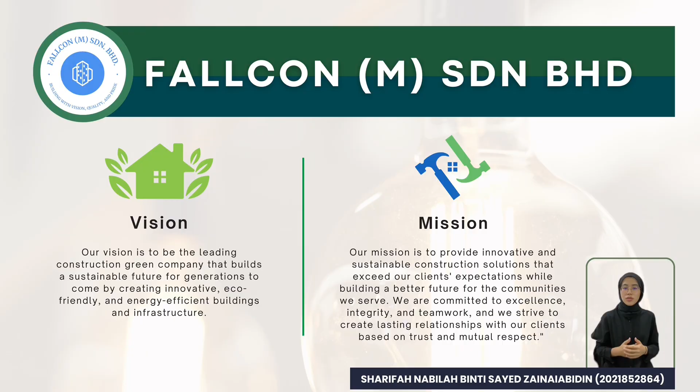Thank you, Sharifah. Assalamualaikum. My name is Azrin binti Hassan. I will continue presenting the project's name and details.

The project name is Greening the College of Creative Arts.

Next is the location of the project. The project is located inside Universiti Teknologi MARA, UiTM Shah Alam Selangor, which is nearby Tun Abdul Razak Library.

The project details are known as the College of Creative Arts that was established in 1967. It consists of complex Ilham Block A and annex buildings. It has a 4-story building of Block A and a 3-story building of annex buildings.

That is all from me. Now I will pass the presentation to the next presenter.

Assalamualaikum, my name is Adriana and I'll proceed with the first issue, which is lighting. The site location has installed a lot of unnecessary lighting in the area. For example, based on the pictures given on the slide, the fluorescent lamps are installed in areas where there is already enough natural light, or especially in the corridor where the light needs to always be on even though there are no people.

Hence, it may be unneeded and lead to more energy use. Moreover, students and staff often forget to switch off the lighting, which results in greater energy cost and increases the carbon footprint for the building.

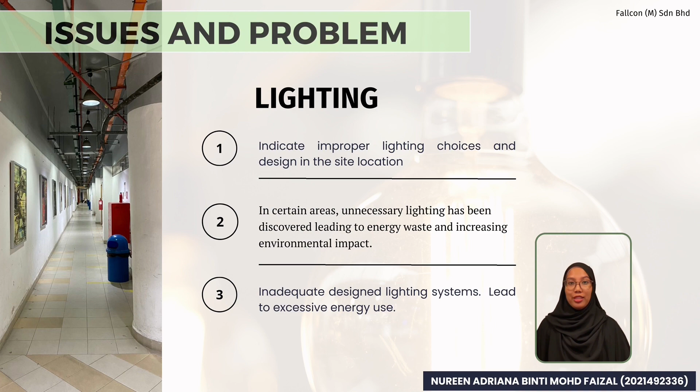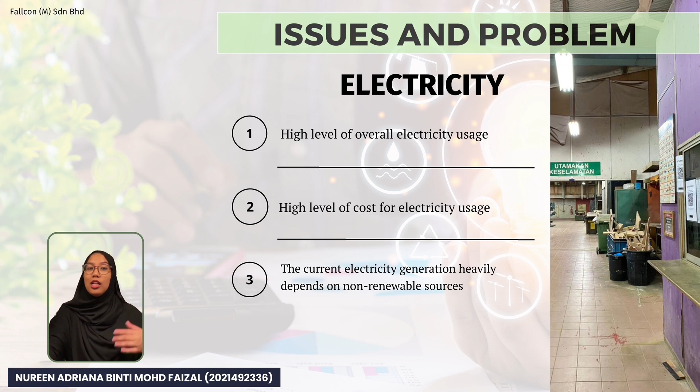The next issue is electricity. This building has a very high level of overall electricity usage. Why? Because at least 2 air conditioners may be found in each and every room. Do you know that one of the contributors to increased utility cost is the air conditioner? Hence, the electricity usage might be higher because students and staff will always need to turn on the aircon, because the aircon also works as ventilation in the area.

Next issue is the water tap. Water taps at the sinks are typical and convenient solutions. However, they might not be the ideal option in every circumstance. Water wastage will result from water taps that dispense more water than necessary. For example, these buildings are used by students of creative arts, who sometimes often use a lot of water for their art too. Therefore, the water taps may result in an increase in the water bill if they are not used with proper care in the long term. Eventually, these types of designs are not sustainable and far from achieving green building status.

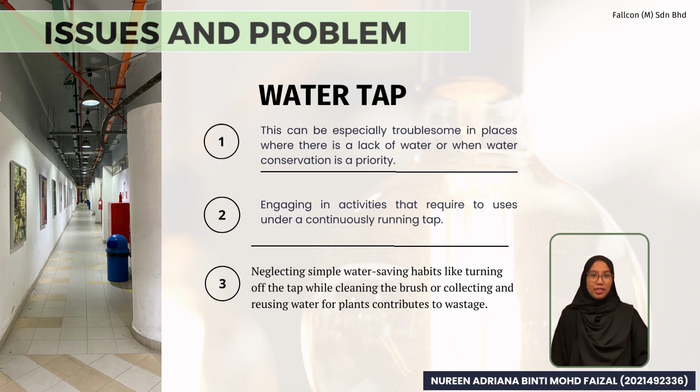Thank you, Adriana. Assalamualaikum, my name is Shaz and I will continue with the next issue, which is roofing. One major concern is the insufficient slope for water drainage. This can lead to water accumulation, leaks, and even structural damage. Moreover, flat roofs lack slope or pitch. This results in poor natural lighting entering the building, impacting energy efficiency, aesthetics, and occupant well-being. Inadequate insulation leads to higher heating and cooling costs and can also cause condensation problems, leading to mold and damage.

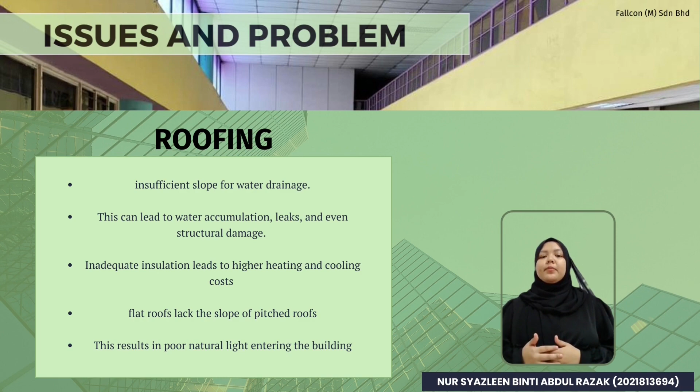Next issue is the rainwater harvesting system. Water quality is a major concern. Although rainwater is generally safe, it can be contaminated by pollutants in the environment. Another issue is the disposal of water. However, unprocessed water from the sky undergoes a natural condensation process.

That's all from me. Thank you. Now I will pass to the next presenter.

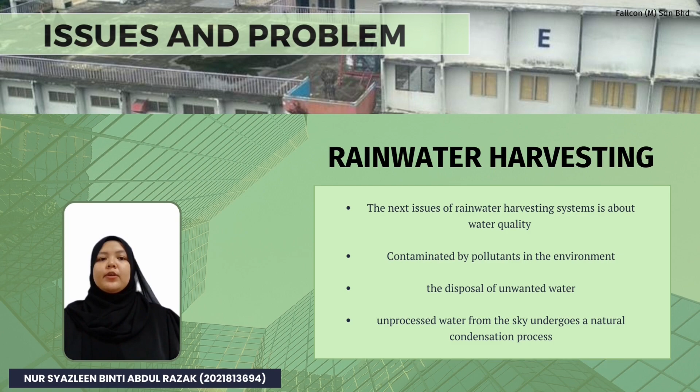Assalamualaikum, my name is Omar Rajidi and I'm going to present the elements proposed in this case. Firstly, we offer a photovoltaic solar panel system that uses the photovoltaic effect to transform sunlight into electrical power. It's an important part of a solar power system that creates renewable energy.

The following element is the polycarbonate skylight roof, which allows natural light to enter the building while safeguarding it from weather damage.

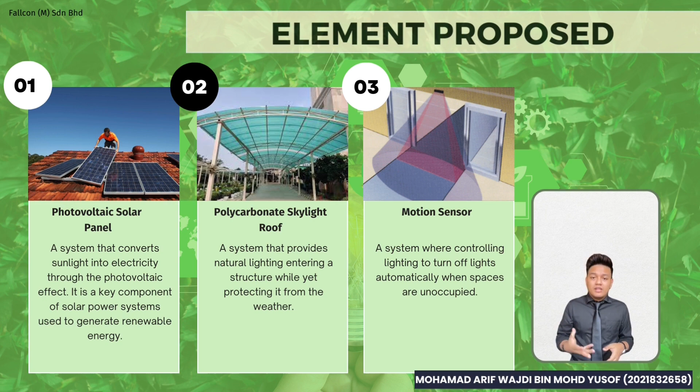Then there is the motion sensor, which is used to manage lighting and turns off lights automatically when places are unoccupied.

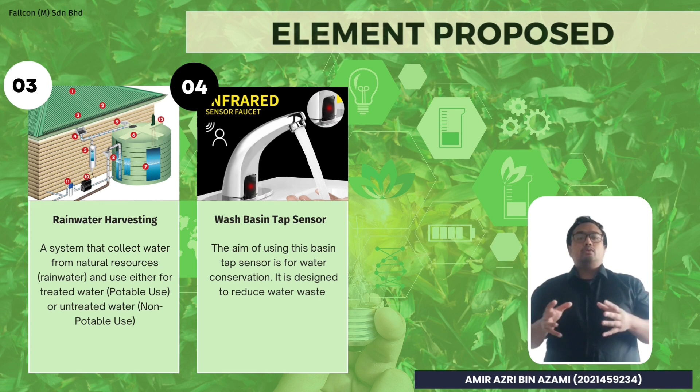The next element that we propose for our building is the wash basin tap sensor. The aim of the wash basin tap sensor is to reduce water consumption and reduce the wear and tear of the components for the wash basin.

Thank you. Now we move to the cost benefit analysis. As you can see in the table, before installation of the photovoltaic solar panel, due to excessive occupant utilization, electricity consumption might be unreasonably high. However, after the solar panels are installed, our electrical expenses can be reduced by 10 to 15%, and we are able to generate income by selling excess energy to TNB and having it reimbursed back to our account.

For the polycarbonate skylight roof, since the system is not yet in place, there are no special maintenance or cost saving considerations. However, after installation, electricity costs can be reduced by up to 15% since it reduces the need for artificial lighting and requires less maintenance. This might result in lower installation and labor expenses.

Before installing the motion sensor, the cost for electricity in the academic building is typically more extensive. This is because lights are left on even in empty areas, resulting in wasted energy and higher electricity expenses. Nevertheless, the initial cost of installing the motion sensor may be more than that of regular lights. Motion sensor enabled lighting systems, on the other hand, generate considerable cost savings over time, with up to a 90% decrease in energy use. Now we will move to Azri for the next explanation.

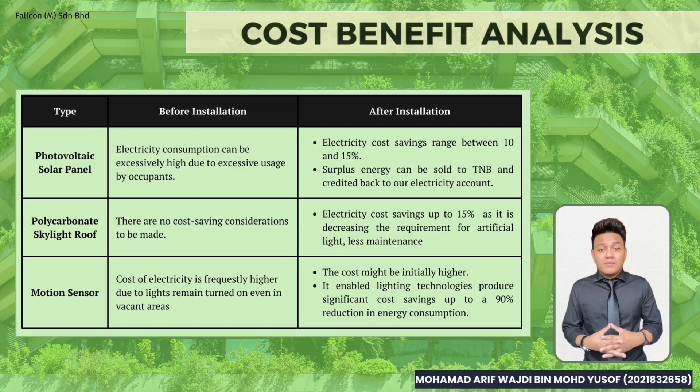Thank you. Now I will talk about the cost benefit analysis of the rainwater harvesting system and also the wash basin tap sensor. For the rainwater harvesting system, before installation, the water used for non-potable use is directly from the local authority, so there are some charges when using the water. After installation, the charges by the local authority will be no more because they use the natural resource from the rainwater. But there are some maintenance charges, though the cost is not as much as the charges from the local authority for normal operation of cold water.

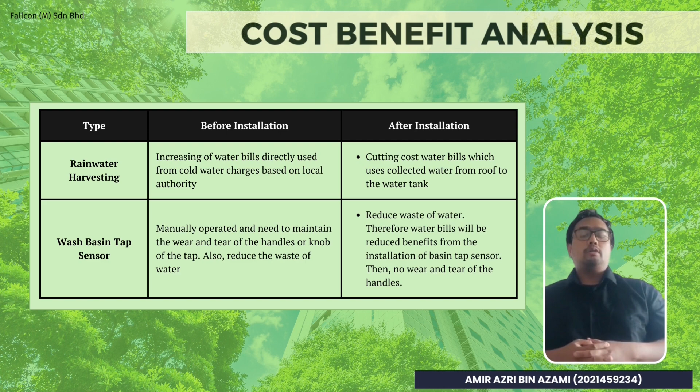So for the next element, the wash basin tap sensor: when we want to use the water, we only tap by the hand gesture. When there is no hand in front of the sensor, no water will come out. This will reduce water consumption and reduce the water bills.

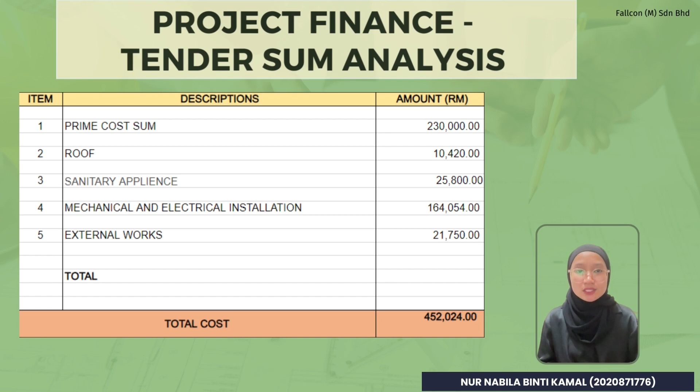Here's an example of how we calculate our LCC of the item sustainable basin sensor tap. Our initial cost is 25,800 ringgit, which we get from our supplier, and our maintenance will be every 5 years over 45 years of academic life building. For the calculation of the maintenance, the PV of 1 at every 5 years we get from the valuation table, summed up until 40 years, gives us 3.571, multiplied by the maintenance cost price of 774 ringgit, which comes to 2,763 ringgit and 95 cents.

Next, our basin sensor tap will be replaced every 15 years over the 45-year academic life of the building. Same as the maintenance, we get a PV of 1 at every 15 years from the valuation table. Then summing up, we get 0.889 multiplied with the initial cost price, which is 25,800. The replacement cost will be 22,933 ringgit and 62 cents. So the total cost for our sustainable washing basin sensor tap is 51,497 ringgit and 57 cents.

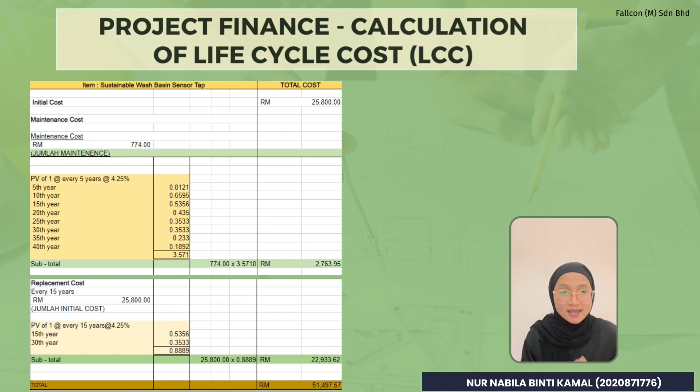So I will continue with project finance for life cycle costs. In this table, all the elements across the 45-year lifespan are included, and this table also shows the total life cycle costs. For our project, we have 5 elements in this building.

Firstly is water efficiency, which is rainwater harvesting, with a total of 43,282 ringgit and 74 cents.

Next, roof, which is installation of skylight roof, with a total of 23,231 ringgit and 91 cents.

For sanitary fitting, we have installation of touchless sensor water tap, with a total of 51,497 ringgit and 57 cents.

Next, we move to mechanical and electrical installation, which is solar workstation and charging, with a total of 303,556 ringgit and 24 cents.

Last but not least, for motion sensor, with a total of 23,900 ringgit and 46 cents. So overall, the total price for this project is 445,468 ringgit and 93 cents.

That's all for life cycle cost. So I pass this presentation to the next presenter.

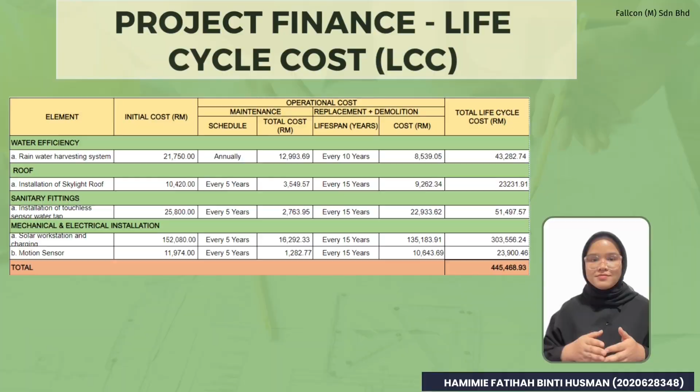Assalamualaikum warahmatullahi wabarakatuh, I'm Hamimie Fatihah binti Husman. Today I'm going to explain the project planning in the work program for our proposed green building project for the College of Creative Arts. The completion period for the whole project will take around 11 months and 14 days.

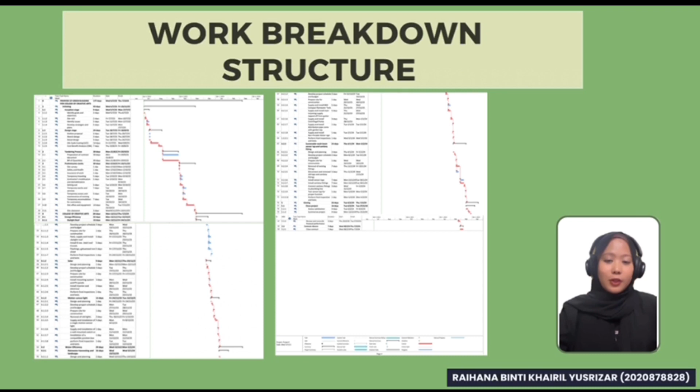To close out the project, it's going to take around 23 days, including evaluating the satisfaction of the client, summarizing the project as a whole, and closing out the project records. We need to review and reconcile regarding financial performance, and lastly we need to close the contract, which is going to take around 7 days.

Assalamualaikum warahmatullahi wabarakatuh, my name is Mohamad Azri Zairie bin Adullah, and today I would like to present about the elements included in the work program and also the critical path.

Overall, there are 5 elements of the green building purpose in College of Creative Arts, which consist of rainwater harvesting system, solar system, motion sensor light, skylight roof, and sustainable wash basin sensor tap and sanitary fittings.

For the critical path, the estimated duration for the project is 177 days. The critical path for the project starts from the inception stage, design stage, tendering process, and preliminary work.

Next, moving on to the construction tasks, it starts from the skylight roof, solar system, motion sensor light, rainwater harvesting system, and lastly the sustainable wash basin sensor tap and sanitary fittings. The last stage is closing the project and closing the contract.

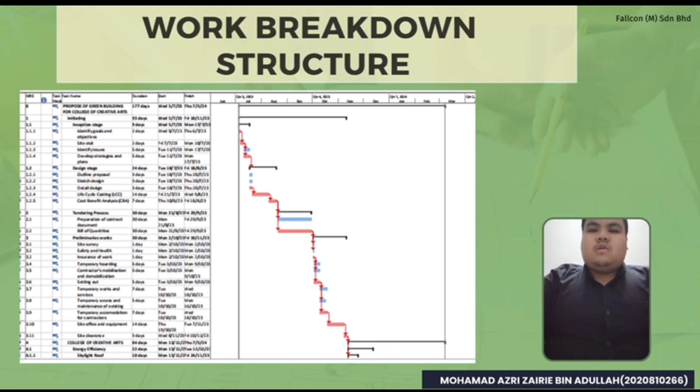Next, the total float for this project is 0, and most of the task dependencies are finish-to-start.